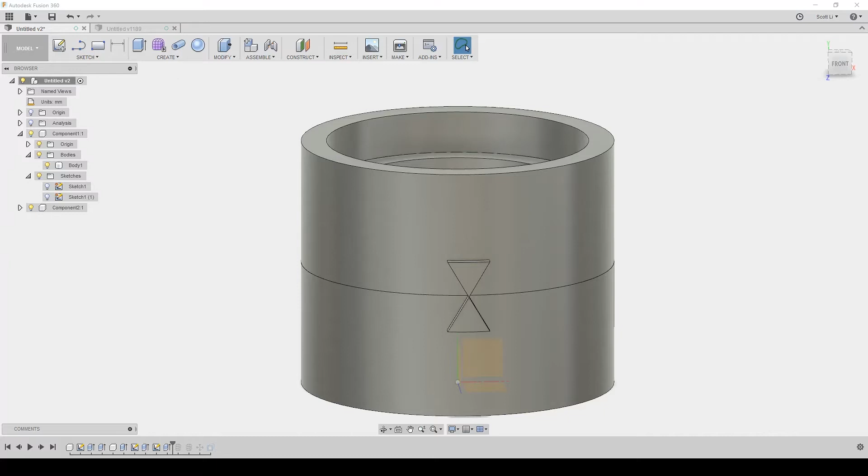So I'm actually not exactly sure what these type of threads are called, but the effect is that when they are tightened all the way, you can have surface markings that line up. I would just call them aligned or matching threads. I'm not sure if that's correct though.

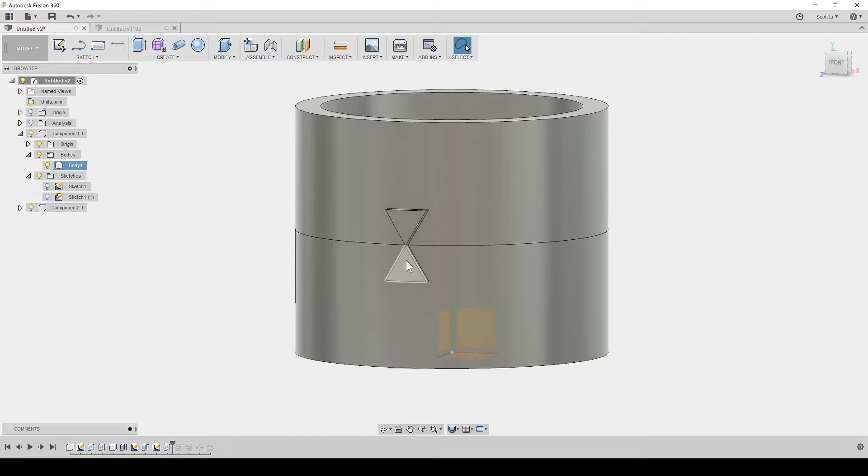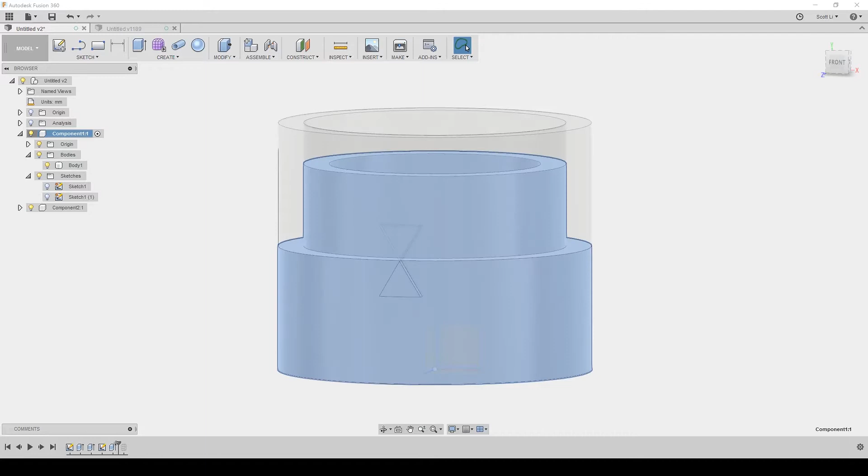So the question is, how do we get this to happen? I created this simple object here to demonstrate this. So first, we will go ahead and create a thread on both pieces. I already picked a reasonable size here. And the other piece, we have a matching thread.

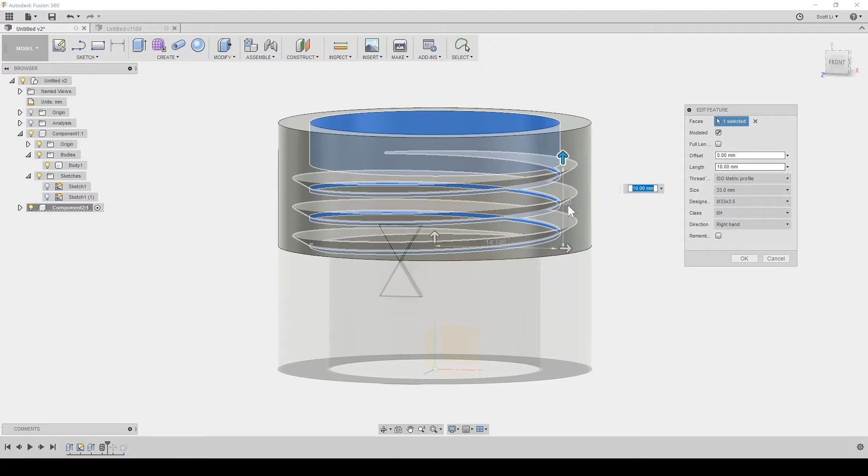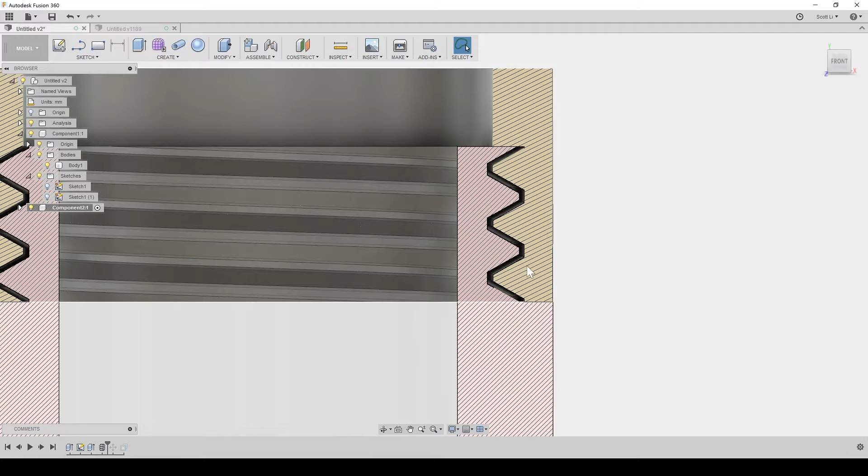So let's go ahead and look at the section analysis. So a side note here is this is not when the thread will lock. It will keep turning past this point until there is contact between the surface and the surface.

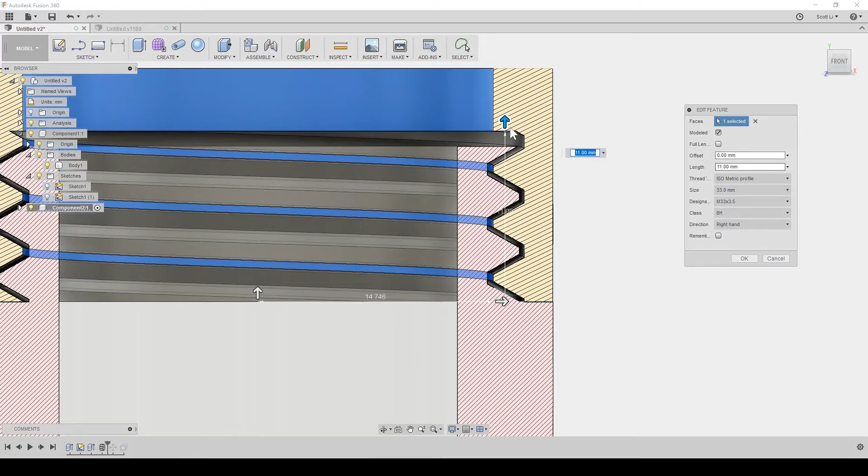But also, let's go ahead and make this a little bit longer to give a little bit more of a tolerance. This side can actually go as far as you want, essentially. We can thread the whole full length. This should not affect when the thread locks.

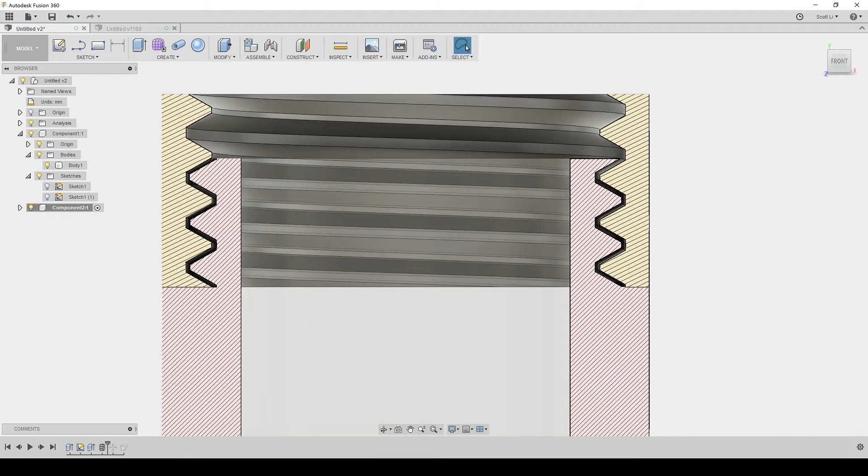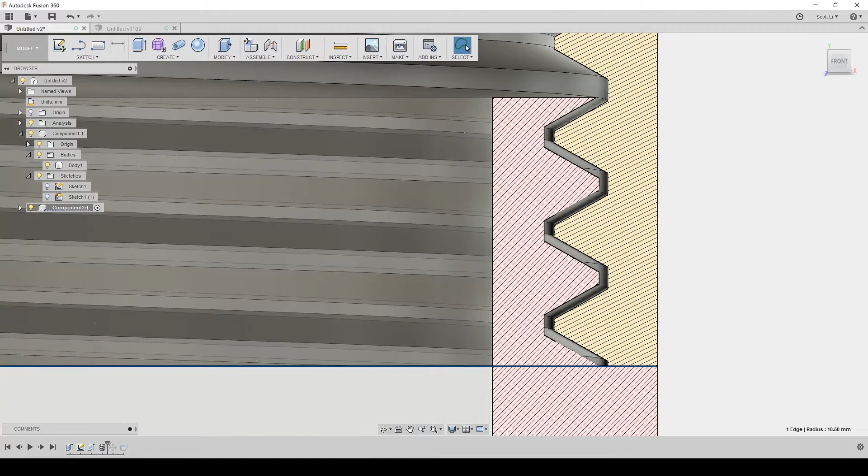So experimentally, I found that the thread locks when this surface and this surface have a distance of about 0.087 millimeters, and that would be between these two surfaces here as well. So we can do this by rotating one of these pieces.

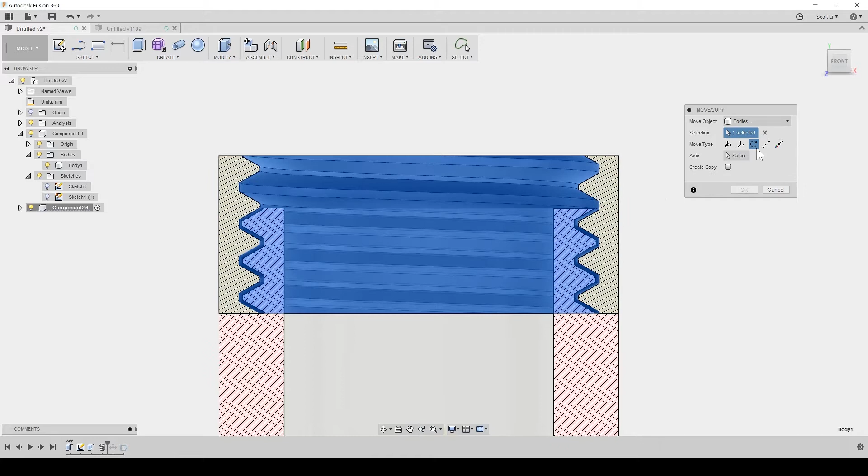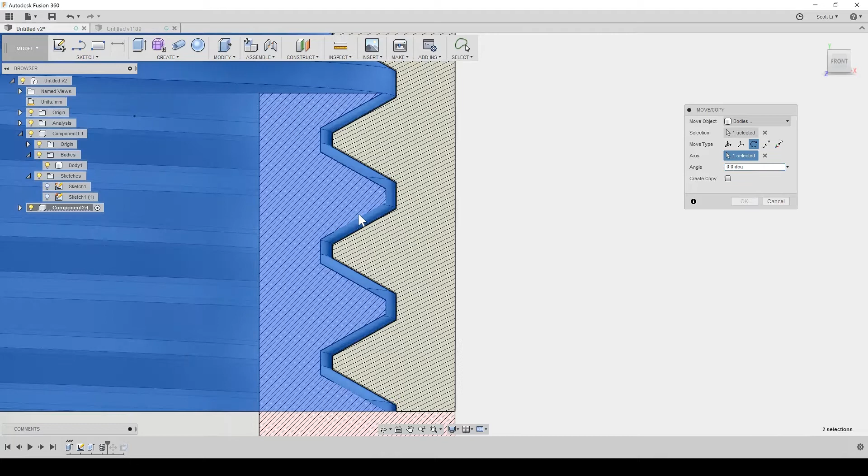So we can see, as we rotate this, these two surfaces get closer and closer. Oh, whoops. Okay. Minus 10, minus 20. So let's say we do minus 25. Then we can inspect the distance between here and here, and that is 0.11.

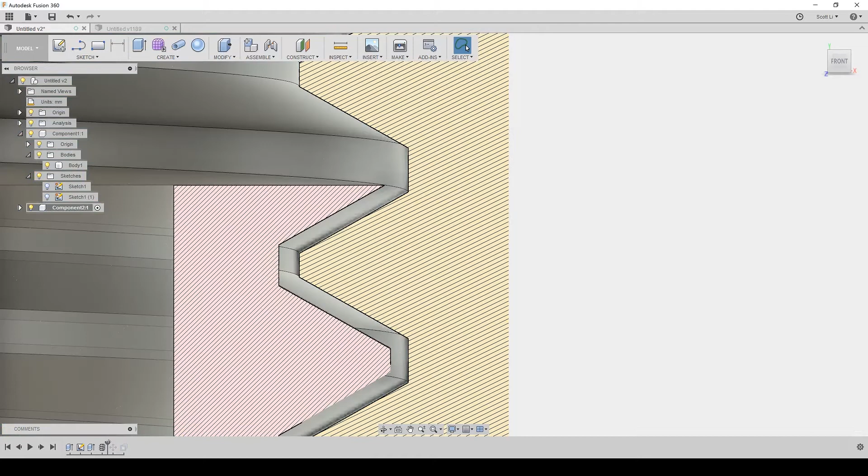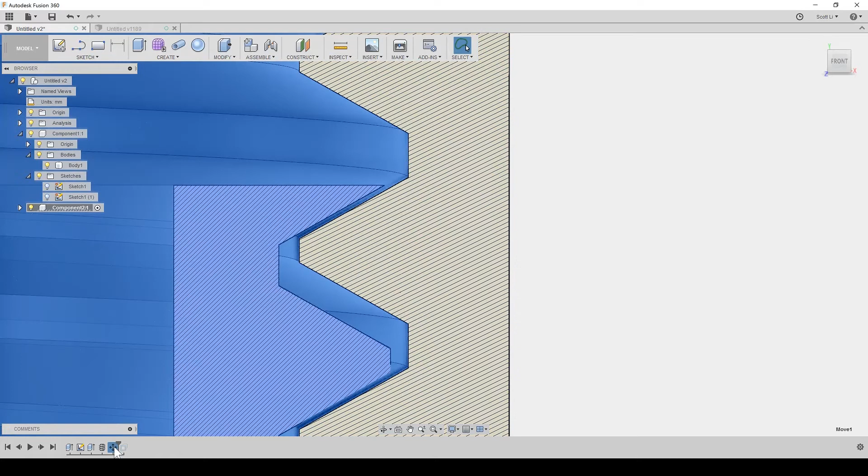So unfortunately, you can't do the inspect while you're in the middle of editing a feature. So you kind of have to just do guess and check to get it right exactly. And I've already found that rotating this by about 27.5 should give you the perfect distance. Well, actually, it should probably be a little bit more. So we can try 27.7. So that's about 0.087 millimeters.

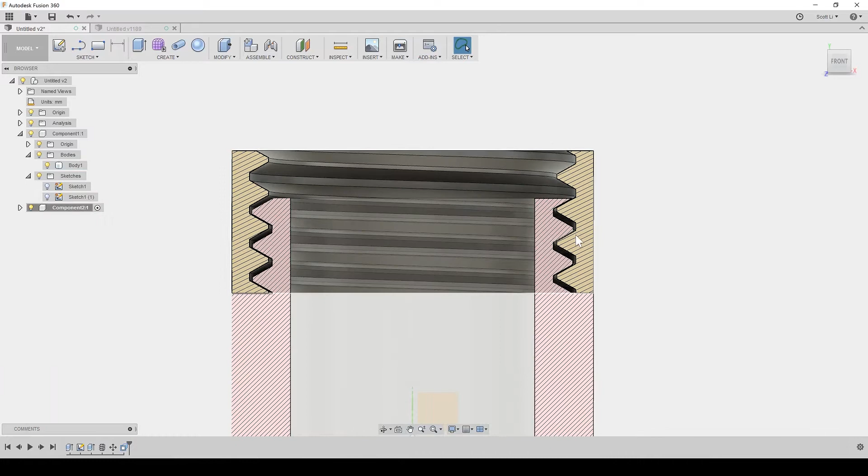And we'll go ahead and modify this surface here as well. So now the thread should lock when this happens. It should be pretty tight. Now let's turn off the analysis, and we can see that we want to move this feature back to the front position where it's aligned.

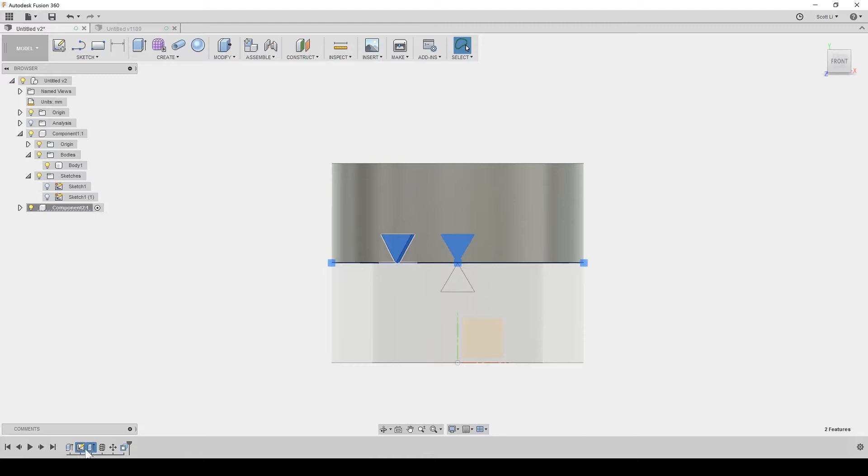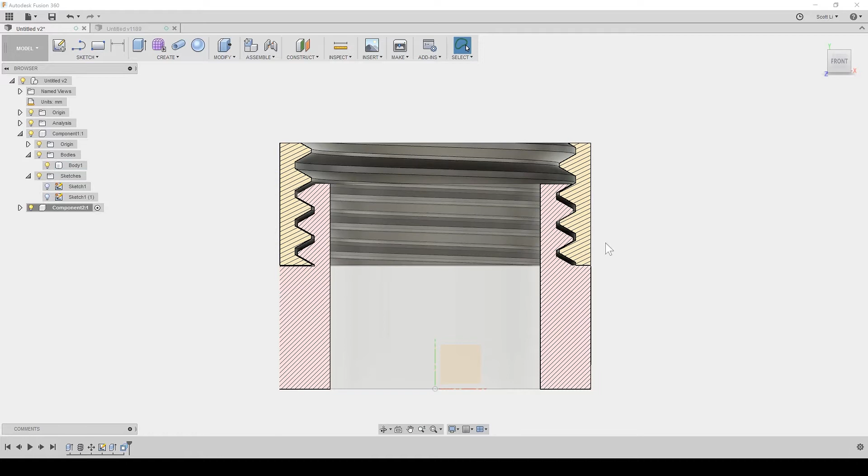So we can just go ahead and take this feature and move it past the rotation, or we could have moved the rotation before the feature as well. Either way works. And then we can look at our analysis again, and nothing should have changed. So this is when the thread will lock, and we have our surface markings that are aligned.

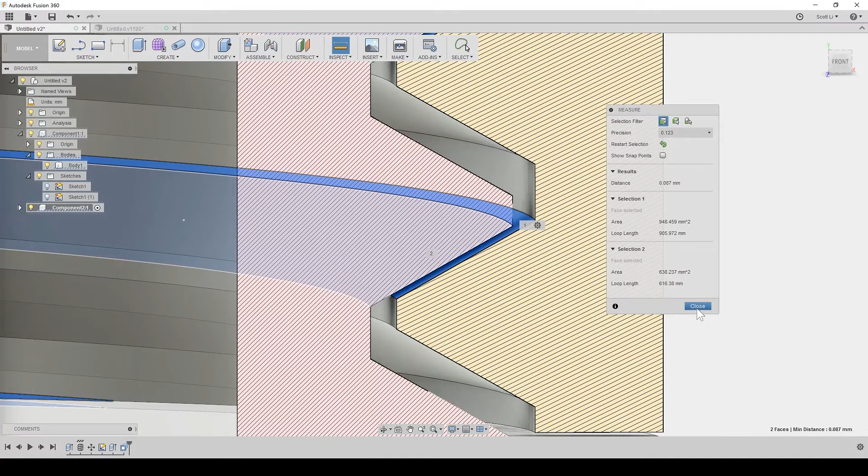One thing that I forgot to mention was that this 0.087 distance or tolerance is intended for 3D printing. So if you're machining the threads, I would imagine this value being less than what they are here. And the 3D printing that I tested was using a LulzBot.

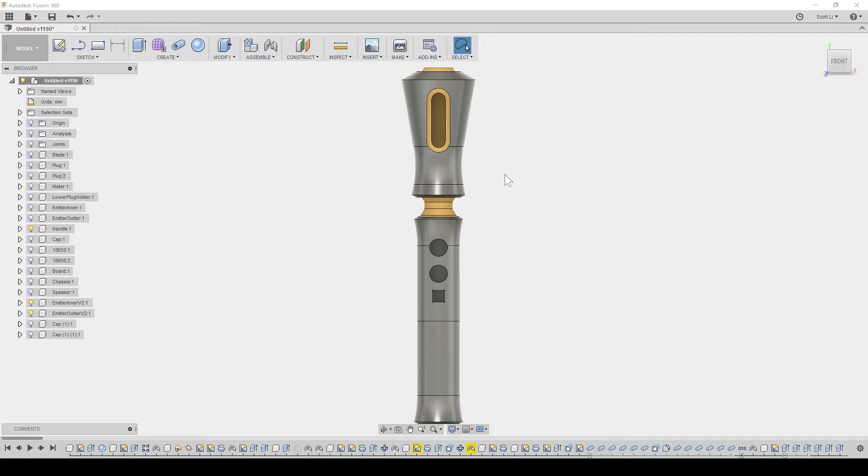So I have a bit of a more interesting object here, and we have the same goal of getting the surface features to line up when the threads are completely tightened. So let's look at the cross-section analysis. We see that these two parts are threaded together, and these two parts are threaded together. So let's start with this top part.

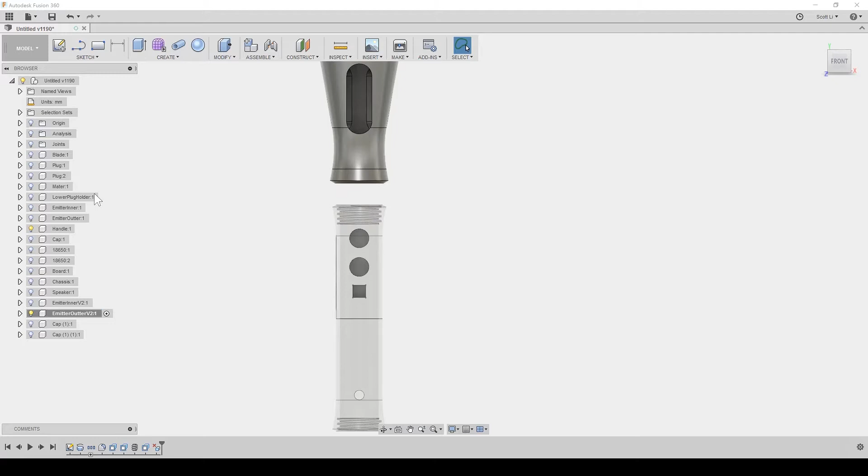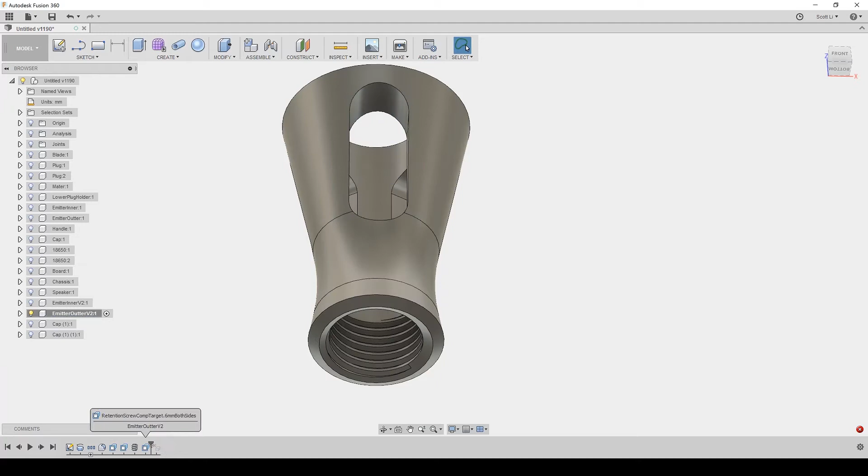So what we'll do is thread this piece and then align all the other pieces to this piece. This should be pretty straightforward. We just go ahead and make this thread. And one thing to note is that, well, two things to note.

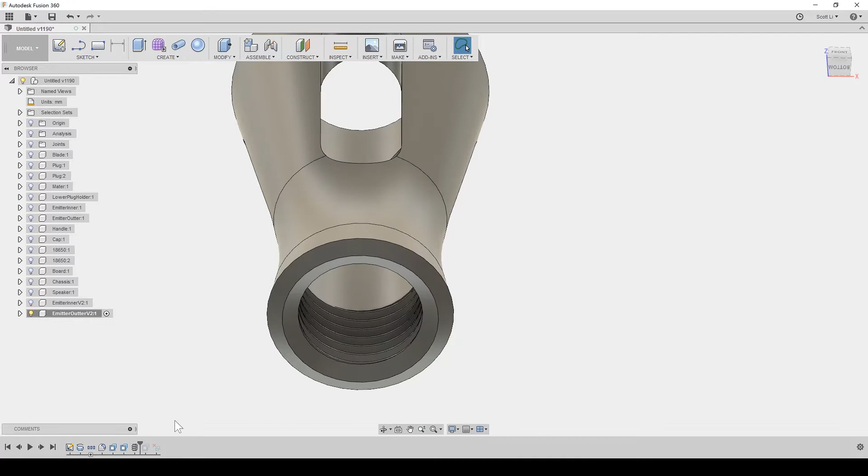One thing is that when you thread this surface, the diameter of the surface actually changes. So if you want the inside piece to be of a certain size, what you can do is just do extrude or press pull, sorry, Modify > Press Pull on this surface.

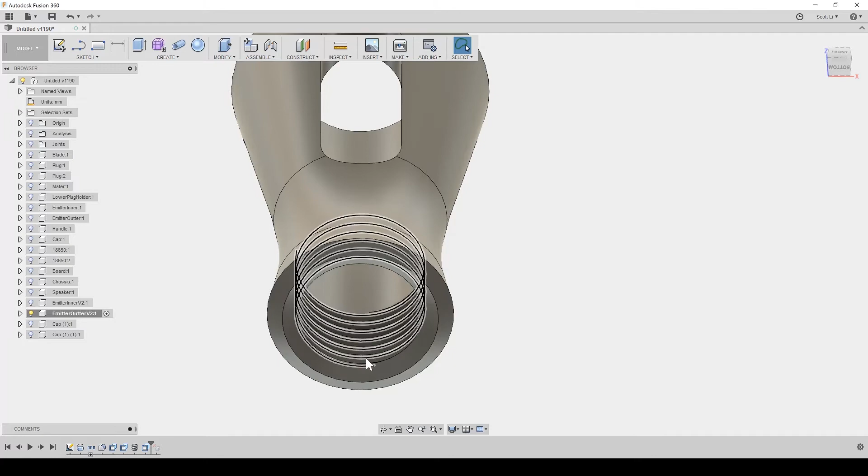And the other thing to note is when you thread this piece, because there's this chamfer here, you get an undercut. And there's this protruding section that will block the thread from sliding past. So what you can actually do is just click this face and click delete.

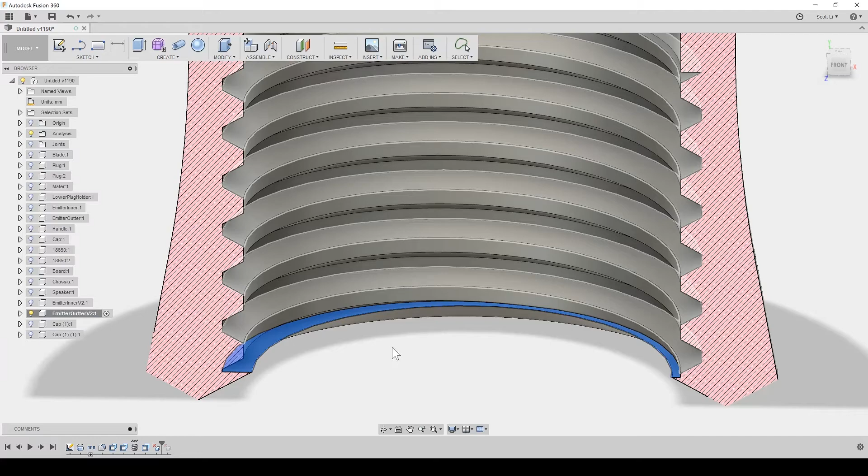And now you see that that section is removed and the thread can start from here. So let's just change that back. So then there is the piece that slides in here.

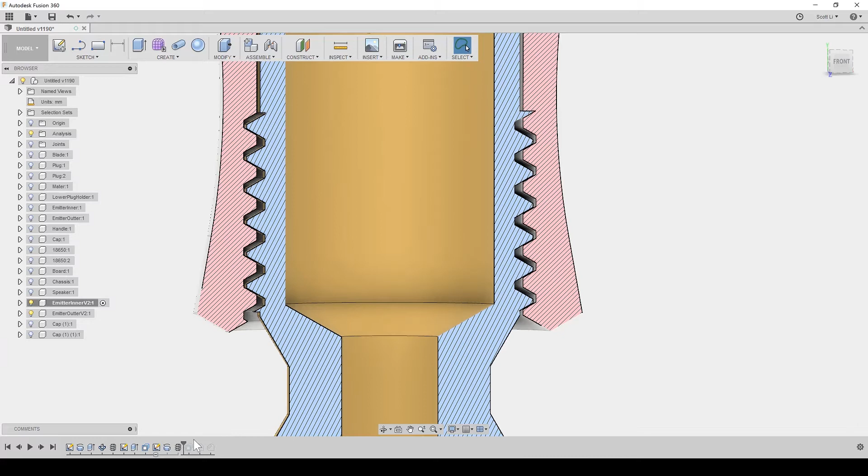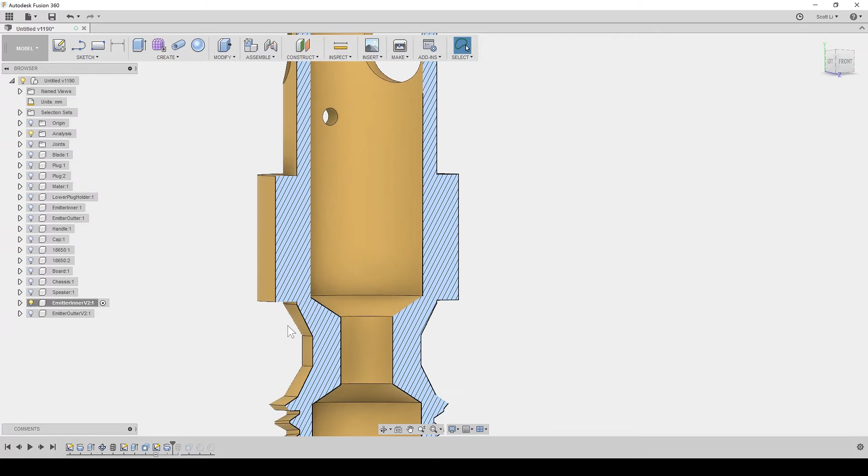So as I said before, when you thread the surface, that actually changes the size of the surface. So what I did here is created the sketch and revolve, which we will thread. And then there's also the small offset here, and I'll explain the reason for that in just a second.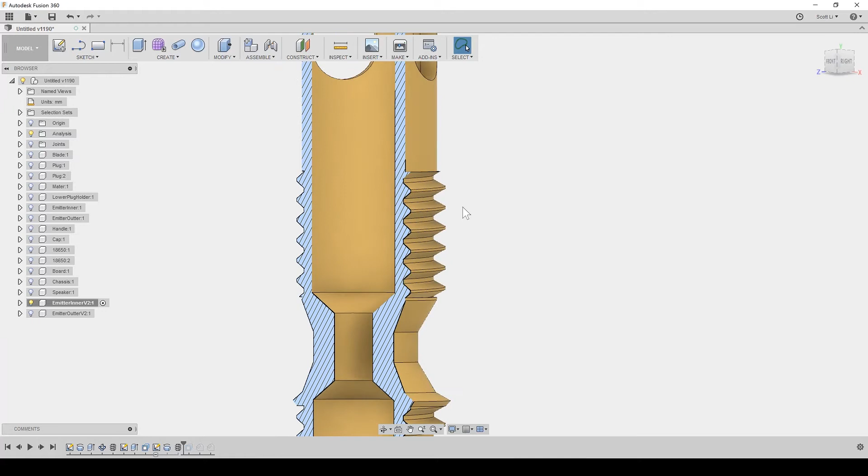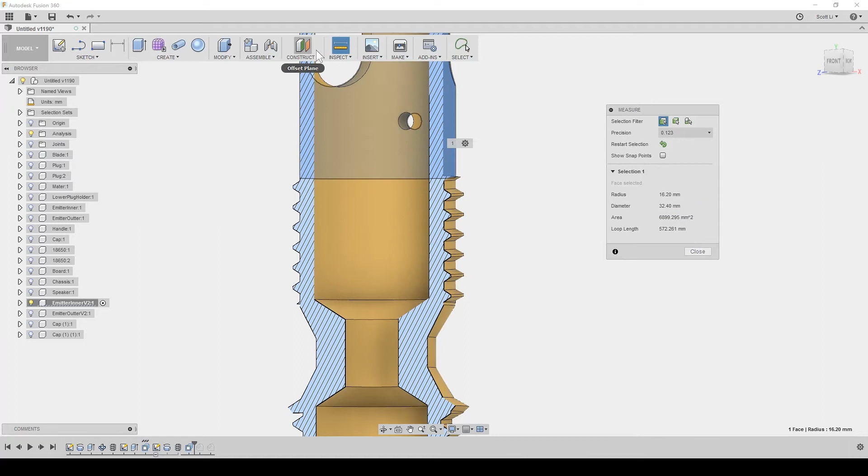So then we see that for this thread, this interface is actually more narrow than the rest of this cylinder. And what we can do is just Modify > Press Pull on this one, and get it to just about match up to the rest of this object. So 32.4, and this is 32.48, so that's about the same.

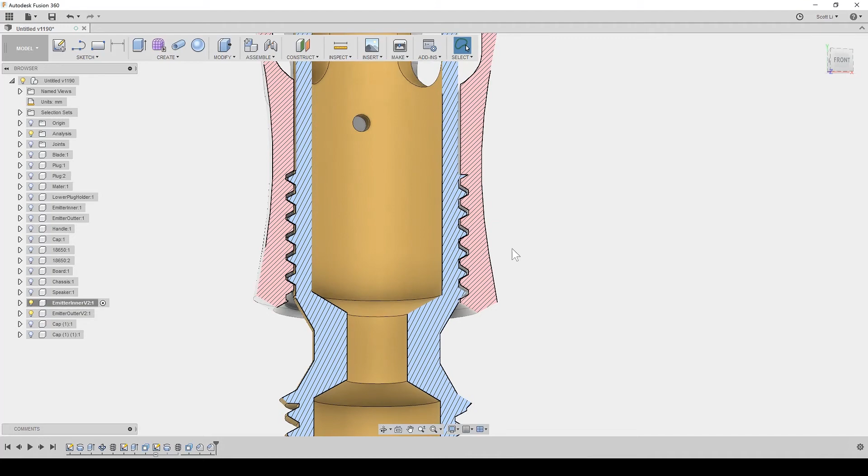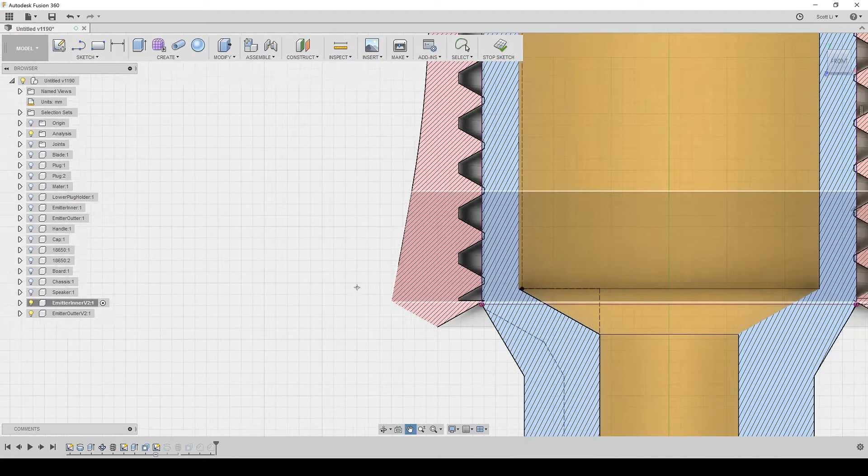Oh, and again, the reason for this little offset is to create this tolerance between the two pieces. As you can see, the distance between these two surfaces is 0.087. And to do that, you can control essentially how Fusion 360 decides to make the threads by changing this little offset here.

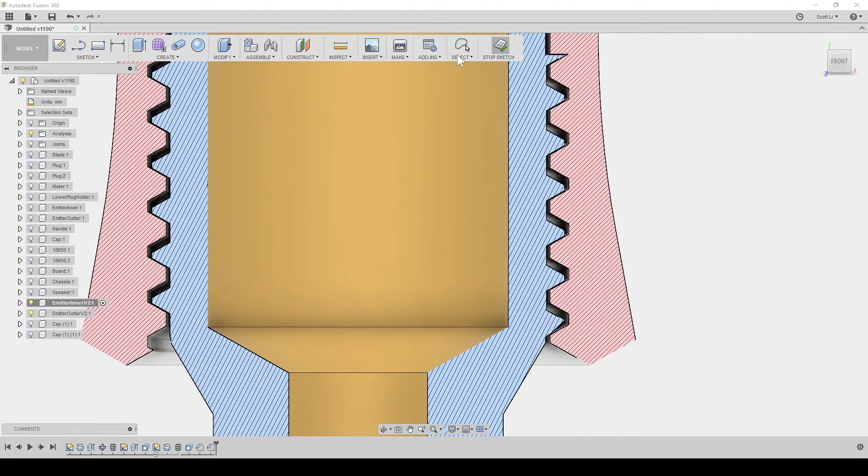So if we start with, say, 25, we see that this should be moved up a bit. So let's do 25.5. We measure. We see that a little further up would get this closer to 0.087.

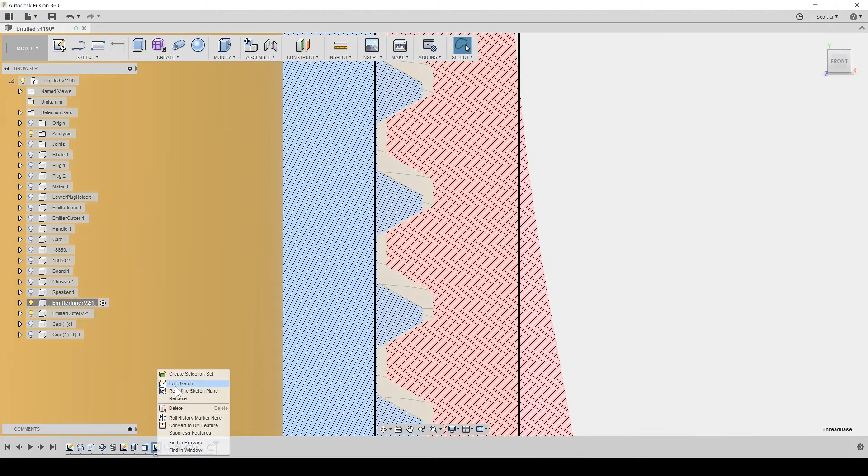So we will go ahead and change this. And as I've already found, 0.533 will get the perfect distance here.

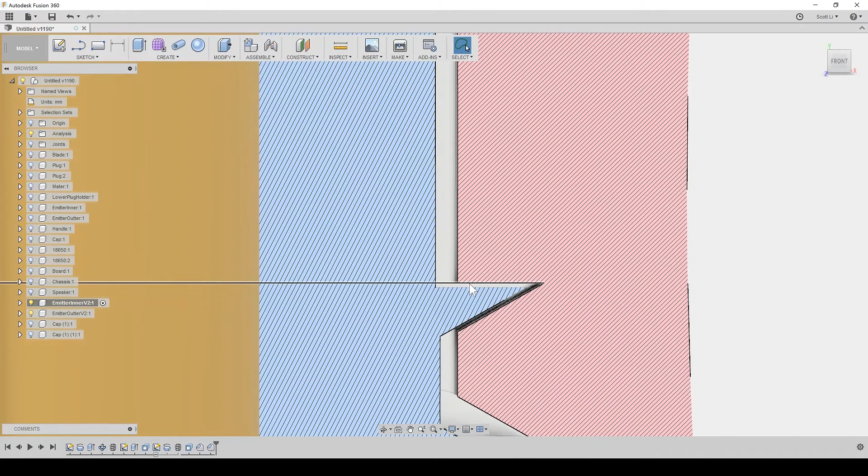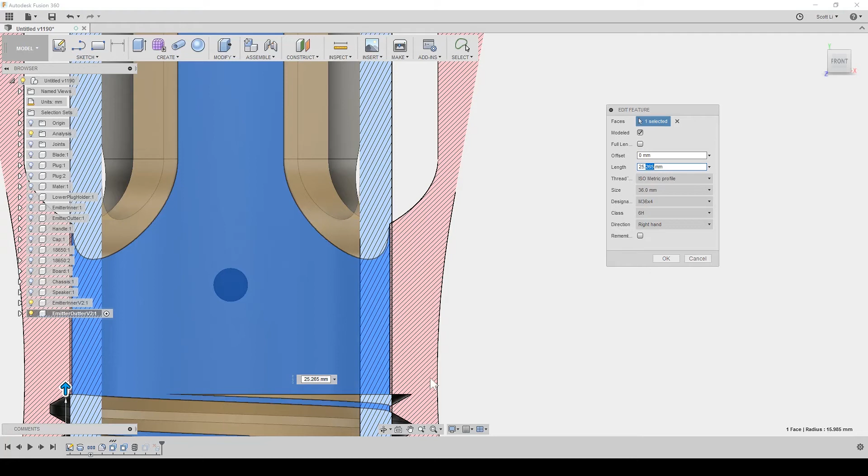Oh, so I guess one last thing to note on the outer piece is that to make this distance 0.087, you can just go ahead and extend the thread of the outside piece. So instead of, say, 25 millimeters, we have some extra distance to make up for that.

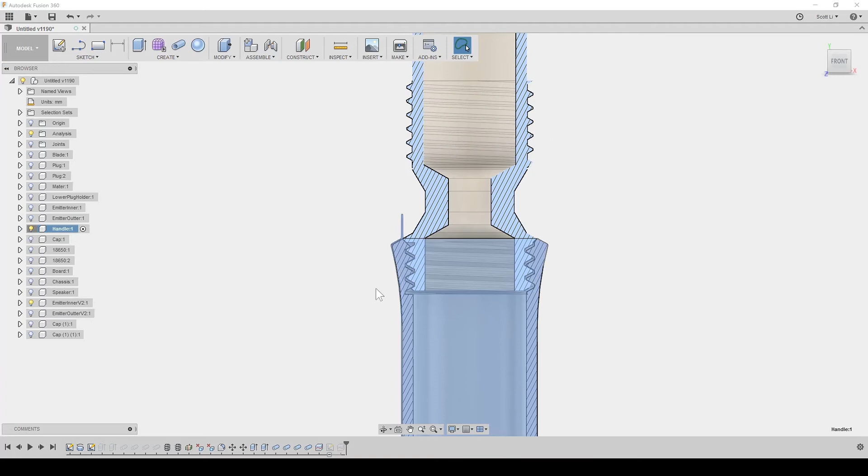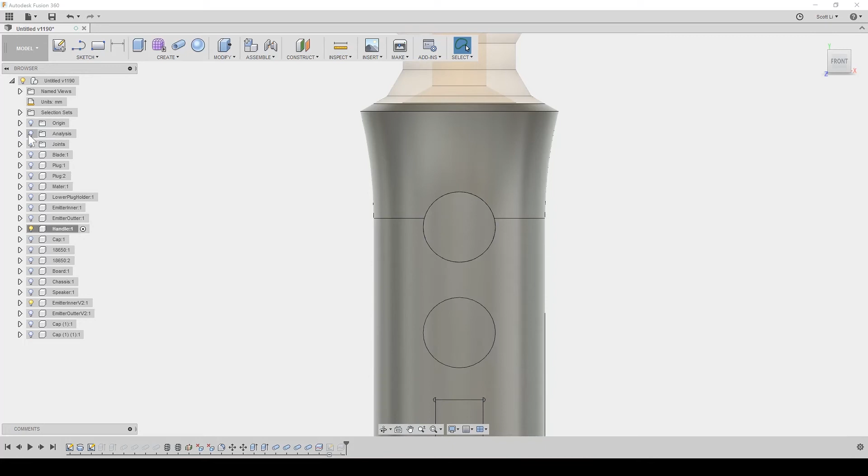So one last piece to look at, and that is the joint between these two pieces. Again, this is kind of like the first example where we want to rotate the piece so that the features match, and then make these features. So first, we just make the threads.

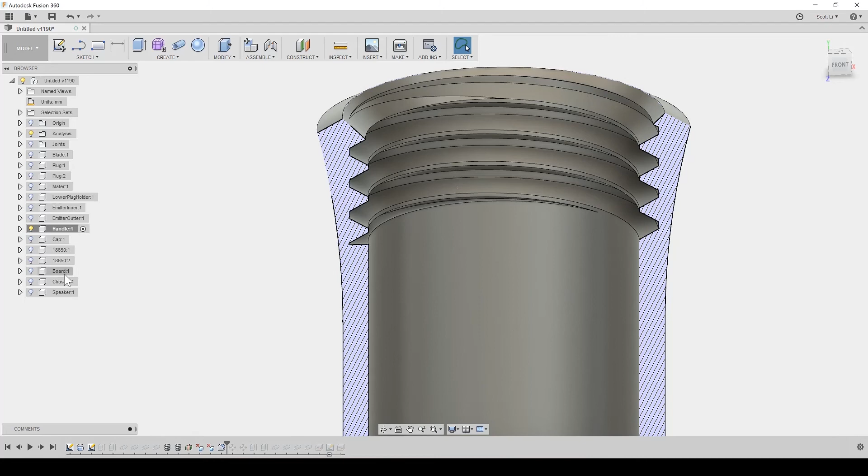And then again, this piece has that chamfer undercut problem. So we can just go ahead and delete those two faces. And then that threads the rest of the surface. Let's turn on this inner piece. So we see without the rotation, here's where we're at.

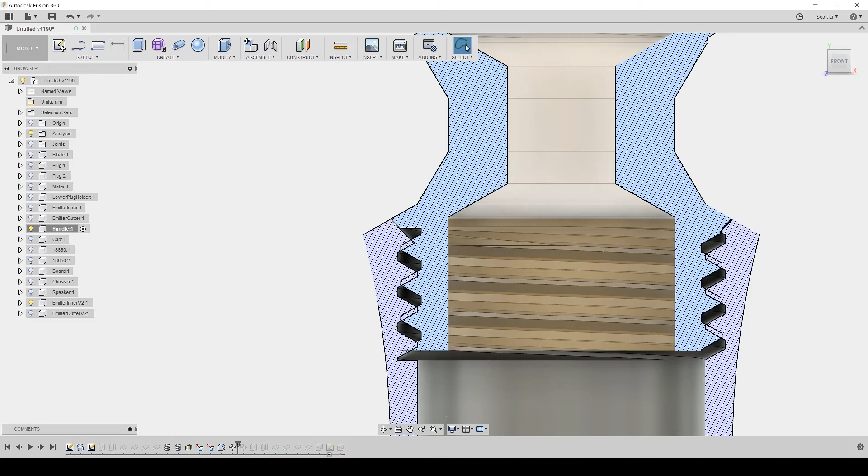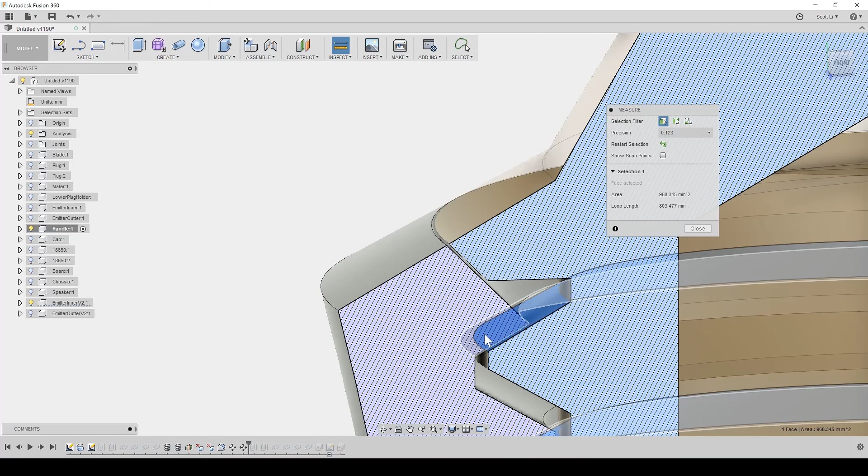Then we're going to rotate. And I think I made a little bit of an offset there so that this surface and this surface are 0.087, and then this surface and this surface about 0.087. So then after this, we can go ahead and make the extrudes.

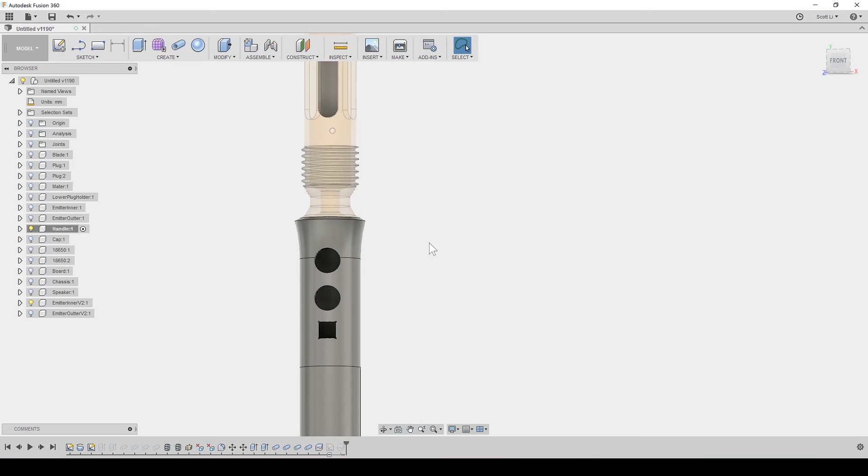And well, there it is. So again, the real trick here is pretty much just to play with whatever you have control over to create this distance between the two mating threads.